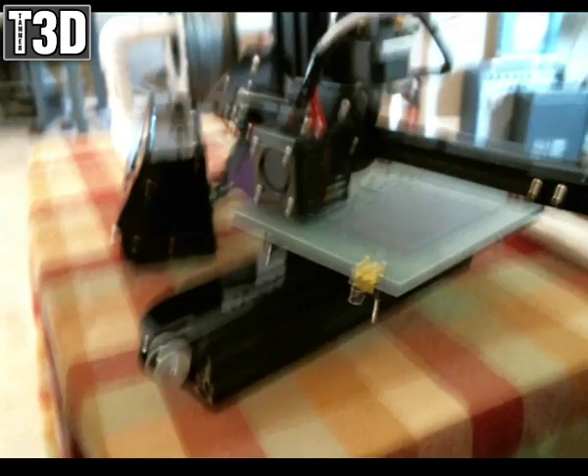Trying to hold my hand steady on 4 hours sleep, it's not as steady as it could be. This is also the first time I've tried printing more than one piece at a time, so I'm testing several parts of the design. You can see the regular flat panel with no axles is printing now, along with the frame connector pieces and the pins to connect it all together. That's what I'm printing at the moment.

And then what I'm going to do is iterate on this design - let me get you guys back up on top of the monitor and get the printer in frame there.

So what I'm iterating on in the design is I'm going to separate this piece so that it can just be glued onto one of the regular flat pieces. Should make it easier to print, because then I should be able to print it in this orientation here, which will eliminate the need for supports.

Good morning, James, or evening, wherever you're at - I think, isn't it?

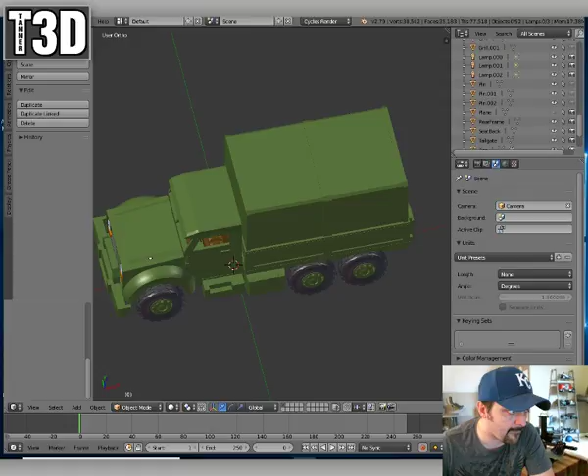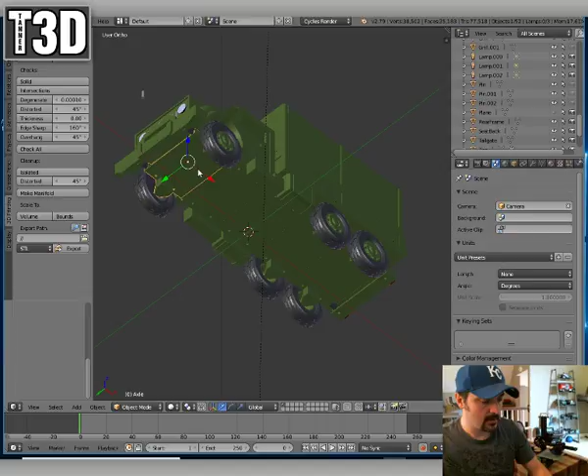We're going to take the truck, and the piece we're concerning ourselves with today is that piece right there. What I'm going to do is copy it and put it on its own layer here in Blender.

James Bird, what's going on, man?

I still haven't solved the issue why every time I slice something, it's off center to the right. My build volume is correct on Cura - it's 150 by 150 by 150, and it stops where it's supposed to on this edge. But on this edge, it starts printing like 25 millimeters in. I can't go edge to edge on the build plate, which when you only have 150 millimeters cubed build volume, losing 25 millimeters sucks.

I'm going to have to try to figure that out, because there's a couple parts that when I get to them, unless I want to slice them into a whole bunch of pieces, it's not going to be printable there.

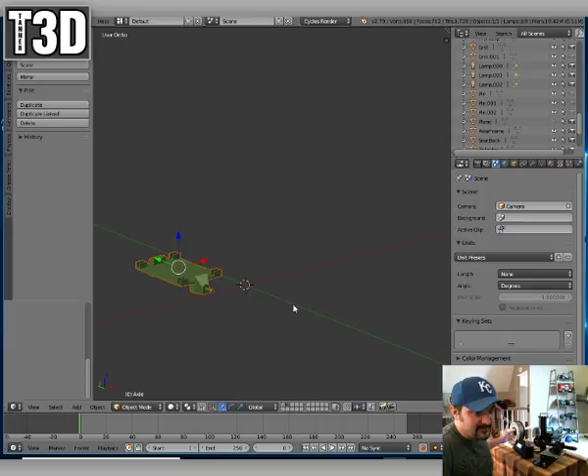So I got these little legs for this side, for the other side rather, that I still need to cut out of the longer piece. Right now I just stuck the longer piece in there and it's stable. This was $5 worth of PVC at the hardware store, and that way I don't have to sit here and manually take filament off of the spool anymore.

Chris, good morning, buddy. How you doing?

Awesome, yes man, that would help me immensely. I probably should have just emailed you when I had the problem. That would be incredible to get the full build volume back on the printer.

Scalda, how you doing man?

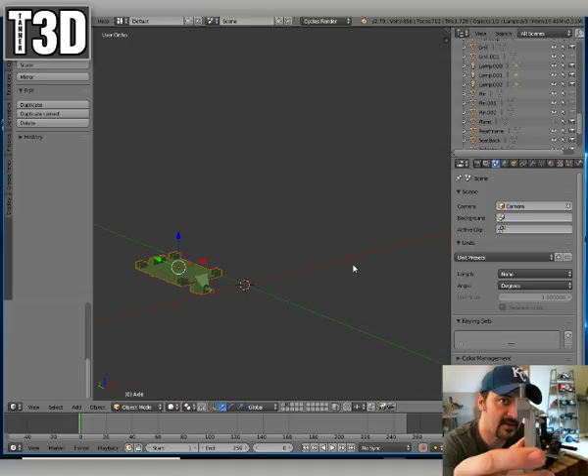So we're iterating the design on the axle. If you weren't here earlier, I printed it successfully, but this thing took a long time to print and had a whole bunch of support material. So my plan to fix it is to make these pieces separate pieces that'll have to be glued onto the flat plates that didn't have the axle design. I'm going to separate just this piece and make it one piece, so when you print it, you just print a couple of those - let me show them on this end. Print a couple of those, and they shouldn't need support printed in that orientation, and it should make it better.

The first thing I'm going to do, and excuse me if I'm yawning, I got in early. I had a closing shift last night, got in at 4 a.m., and my wife called me at 8 a.m. and woke me up to go deal with some stuff at the bank. So I was going to start streaming as soon as I got up, but I had to go run and do some stuff.

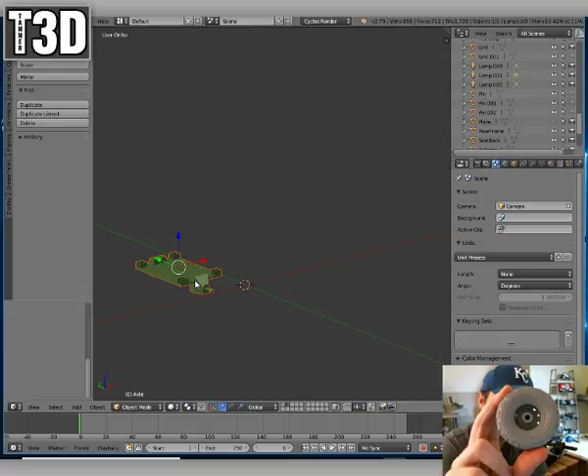I'm so happy to be printing stuff, you have no idea. In case you weren't here earlier, that is a tire and wheel that has been successfully printed. Looks pretty nice. My design requires a little bit of support because of the rounded sidewall of the tire, and the supports don't come off that clean. I guess I could sand them, but the way I've got the wheel oriented, it's facing the inside of the model anyway, so it's not really that big a deal.

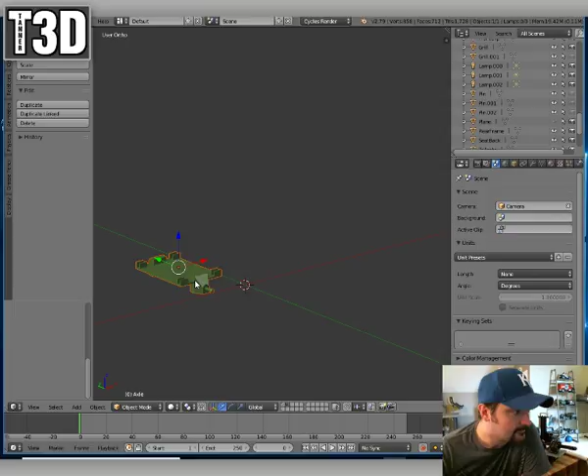I don't know how long I'll be streaming for sure. I know I got to leave to pick up my son from school at 1:30. It is 11:09 here, so I'll definitely be done by then. But otherwise I'll sit here and chat with you guys as long as I can, and as long as you're willing to listen.

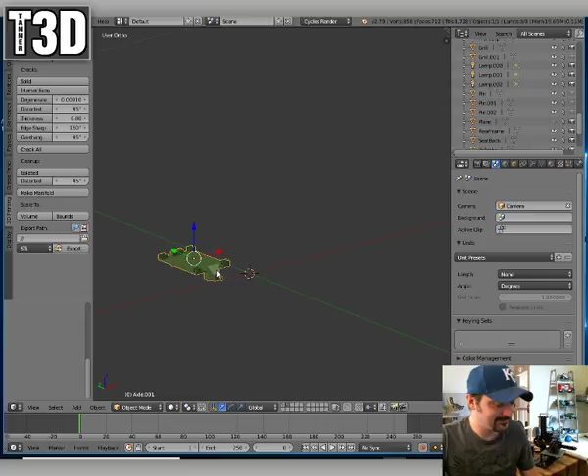The design iteration shouldn't take me too long, I don't think, because all I'm really doing is here - clicking on the vertex mode, edit mode. I'm going to hit Z to go into wireframe view. I'm trying to be better about explaining what I'm doing step by step, so that if you guys want to learn to do this stuff and try it yourselves, you can.

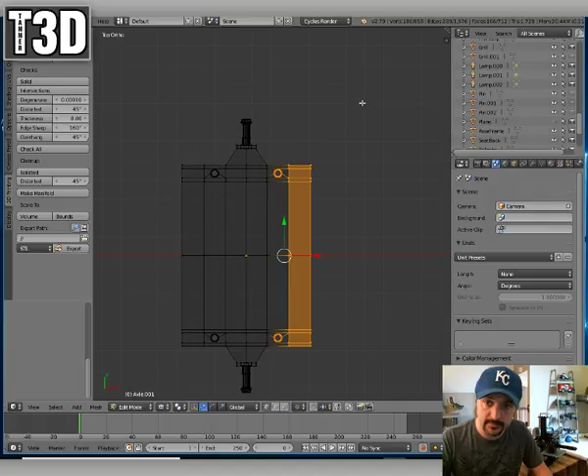I hit the B key on the keyboard, that's a box select. I'm going to select all the vertices that aren't part of just the one axle piece, which I think those vertices are. Alright, and I'm going to hit delete vertices. Hit Z again to come out of wireframe mode, and now we can see there's the axle isolated all by itself.

Now, in order to make it a manifold piece again, I'm going to have to close off that hole. Best way I can think to do that is I went into the edge mode here, and I'm going to select those edges. You hit the F key and it makes a face - see, so it made a face between the two edges I selected. Select those two edges, hit F to make a face. Those two edges, F. Those two edges, F. F. And F.

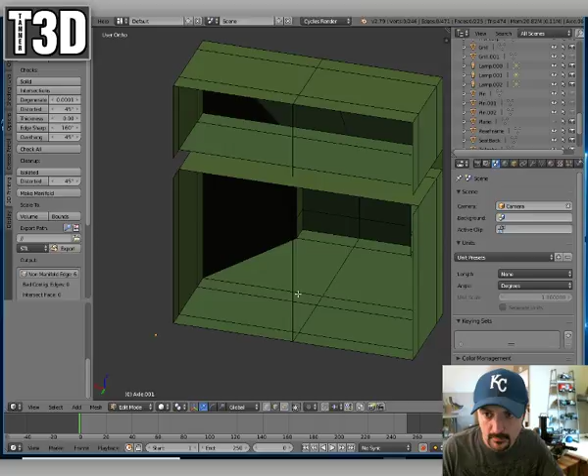Let's undo that. Let's go to face. Let's delete this face and delete this face.

So down here, these three little buttons. This one is vertex select mode, which allows you to select individual vertices, or if you hold down shift and select more than one vertex. If you want to grab multiple vertices, you'd hit B to do a box select, or C to do a circle select, and as long as you hold down the button, it grabs whatever vertices you drag the mouse over.

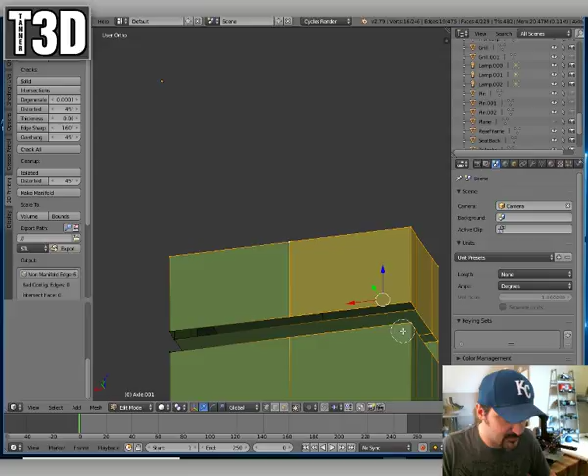And then this is edge select mode, which you'd be able to select all the same ways, using B to do a box select, or C to do a circle select.

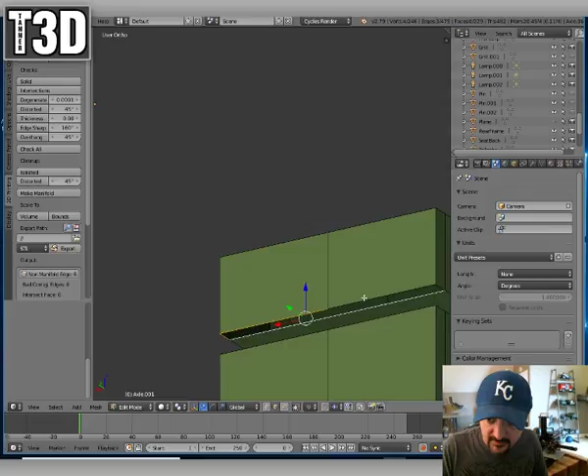So how I'm going to try to fix this, and sometimes it usually works out well, is to select individually every edge along that. Now when I hit face, it should include each individual edge there in that face. Because the way I did it before, when I only selected this one and this one, it made a 4-sided face. Technically it's a 5-sided face because of the dividing line there, so I'm creating an N-gon.

N-gon is any shape with more than 4 sides, but it doesn't seem to affect things too bad as long as your part is manifold. Sometimes you have some issues and you have to go back and redo it.

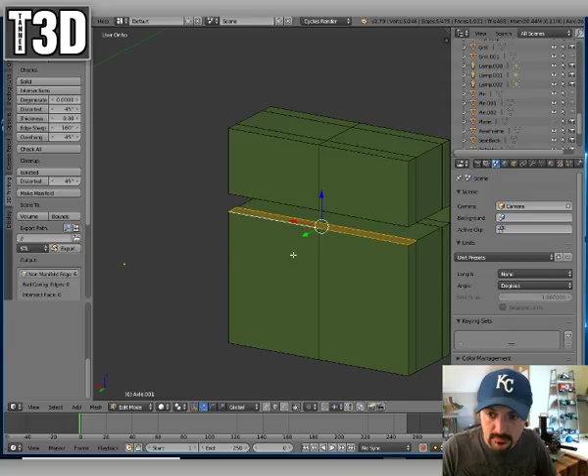So I selected all 5 individual edges, hit F to make face, and now we'll go back over and check all again. As you can see, we eliminated our non-manifold edges.

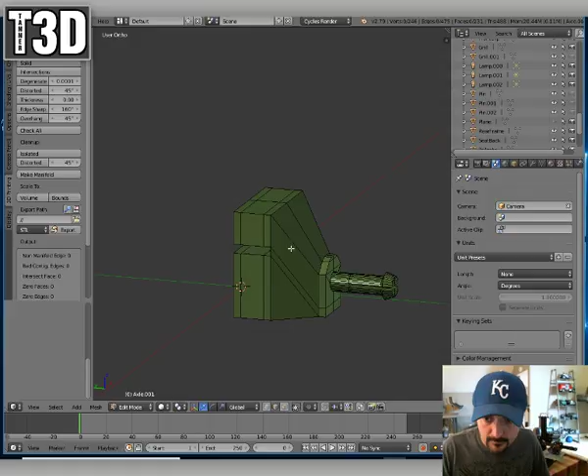All right, so here is the piece now that I think I should be able to just print out and orient it so that the axle is pointed up. I should be able to print that, I think, because that would be some very, very minor bridging. I think I'd be able to print that with no support at all, and it would be okay.

Yeah, James Bird. The computer I'm using now is an HP workstation, the XW8600, and I bought it as a refurb unit back in 2008. It's got a quad-core Xeon in it and everything, but it only came with a 32-bit version of Windows.

It's a machine capable of running 64-bit Windows, but in order to upgrade, you can't just run an upgrade like you would on a different version, like from Windows 7 to Windows 10. You can't just run an upgrade, because you're changing at the very kernel level from 32-bit to 64-bit. The only way to do it without error is to completely wipe the drive and start over.

There are so many things on this computer that I don't want to lose, and I would never be able to back it all up because it's 10 years old. My best bet is just to move forward with another machine, and that's the plan. It's in the future.

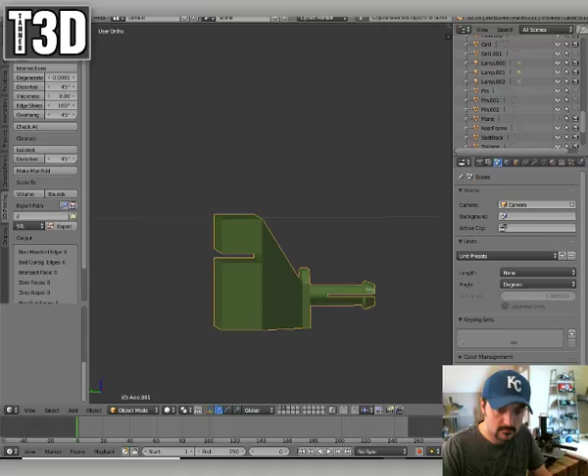So I'm going to go back over here, finish this up, save it, copy that... paste it in here, and export it as an STL. That was under MVS Truck, and we're going to call it Axle V2, with an underscore. All right, export STL. Oh wait.

Ha, almost forgot. For some reason, when you're exporting, it doesn't keep scale right - you have to multiply everything before you export it in Blender by 1,000 in order for it to maintain its scale. It's weird, you know, I'll use the MeasureIt tool, and it says it's spot on, but if you just export it the way it is, it's teeny tiny. So, scale times 1,000, Axle V2, export STL.

So now we'll go over here, Axle V2, open it up in Cura. You'll see that lovely Cura 2.3.1 popping up here in a minute. There it is, 2.3.1. Everybody kept telling me to check my build volume in Cura that I had designated, but the profile that I set up - I did it all on my own, so I'm sure I messed all sorts of things up. There's probably a lot of settings that could be done better because I was just winging it. But I have it set to 150 by 150 by 150.

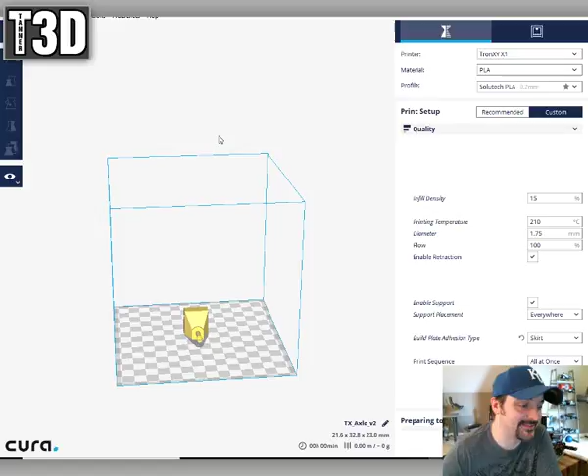Yeah James, man, if you got it, I'm open to all ideas. Chris is going to send me some screenshots of where I need to change some stuff, like setting my home point or whatever it was that he said. See, I'm so new at this, I don't know what, but I know he's going to help me. That's where I'm at, and I'm excited, he's already helped me so much. Not only would I not have this machine right now, it would not be running without Chris Riley, because if you watch the live stream where I set it up and attempted to print for the first time, it was essentially Chris popping in and me going, okay, what do I do next? Because I don't know.

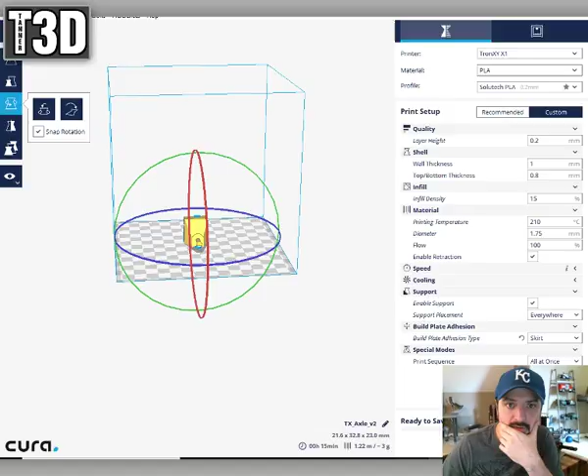No, origin to center is not clicked. I can show you - there's the settings, printer, manage printers, TronXY X1, machine settings. So machine center is 0 is unchecked, heated bed is unchecked, all this stuff. The only thing I messed with was this, trying to see if that was originally set to 20 millimeters. I set it to 0, hoping that was my problem and it would start printing over, but that didn't seem to make any difference. I don't know why the gantry height is all 9s - that was default and it seems to be working, so I left it alone. But yeah, my width, depth, and height are all set to 150.

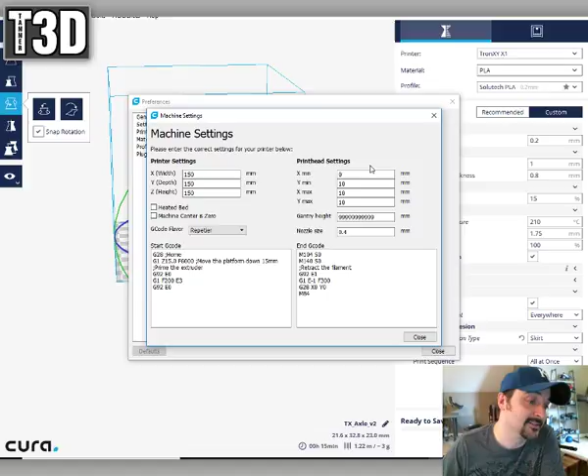And then the print head settings, by default for some reason that was 20 millimeters, and again I don't know what any of these settings actually do or mean, I was just trying stuff that was originally set to 20 millimeters. I set it back to 0 and was hoping that would get me my 20 millimeters or so of the bed that was missing, and it didn't seem to affect anything.

So anyway, we've got this. Let's stand it up on its end. Come on now, not wanting to rotate. There we go, stand it up on its end. See if it slices. Slicing.

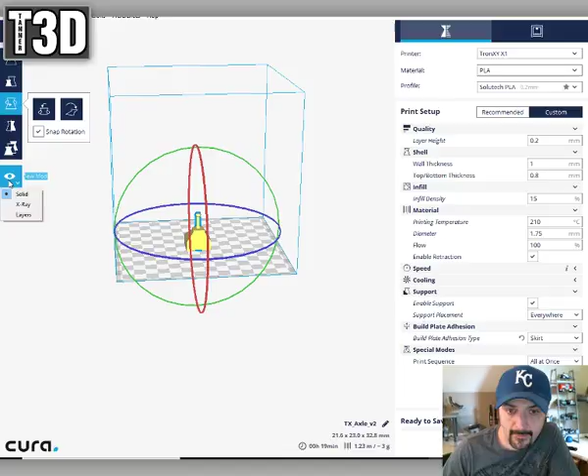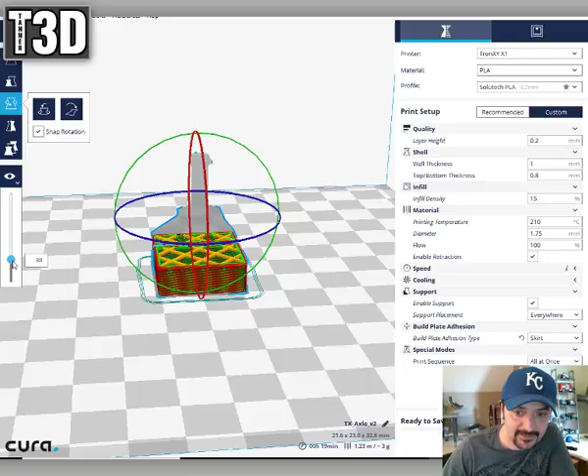View mode, layers. Scroll in a little bit. Let's go down here - this is what I did not do with the other, was check this part. So it's going to have to bridge down here. Rotate that around, or have that supported, either way. Right now it's got supports turned on, but I don't think that's too extreme of a bridge. It doesn't look like it's enough support material to worry about anyway - looks like I can snap that out pretty easy.

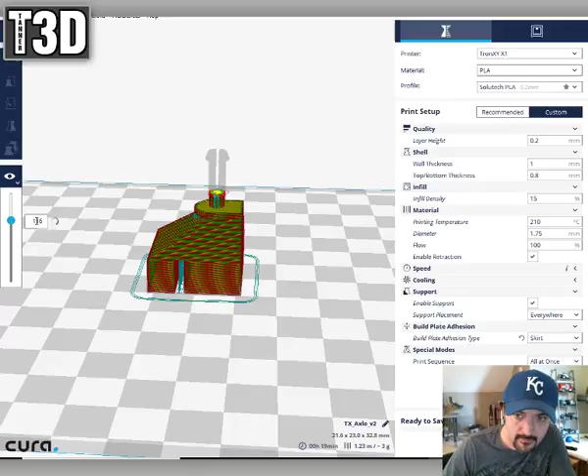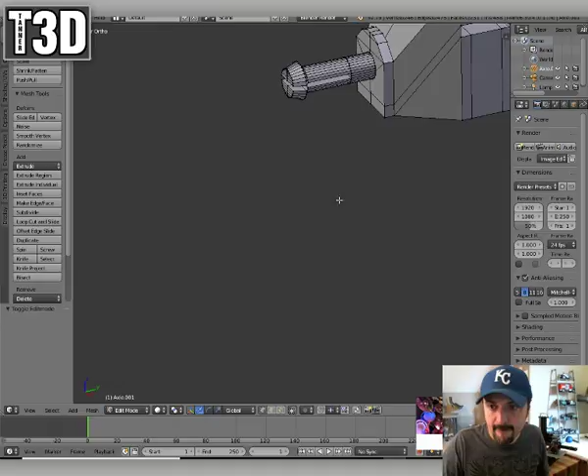You know, another thing that might make this more rigid, might make it better - I'm going to go back into Blender and change something else about this. I'm going to make less of this space here. I think that might be too much, and it's compromising the rigidity. I think that will be enough to give me the deflection I need to press that piece in, and I may actually take that and scale it in a little bit, make that a little less pronounced.

I'm thinking it might be a better idea to thicken up the whole axle too, this whole shaft, to make it wider. But then that's also going to mean I'm going to have to modify the wheel again. I think if I do that, I can keep this wheel and not scrap it by taking a drill and drilling out the inner diameter there a little bit, and still make it a usable wheel, and then just have to change the design on the wheel in the future.

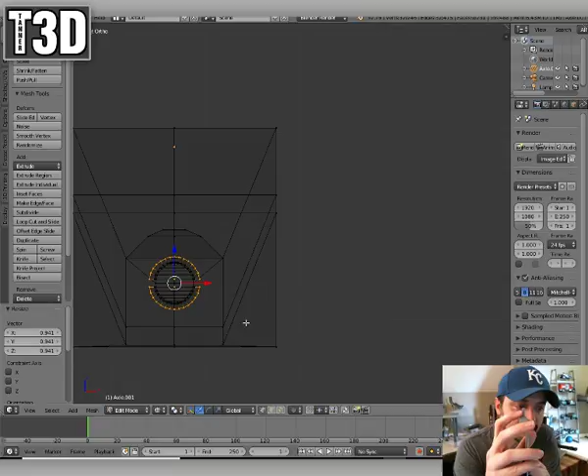I don't know, what do you guys think? Do you think that the axle here looks too thin? Am I going to run into problems snapping that off all the time just because it's so thin?

Thank you, James. I appreciate that, man.

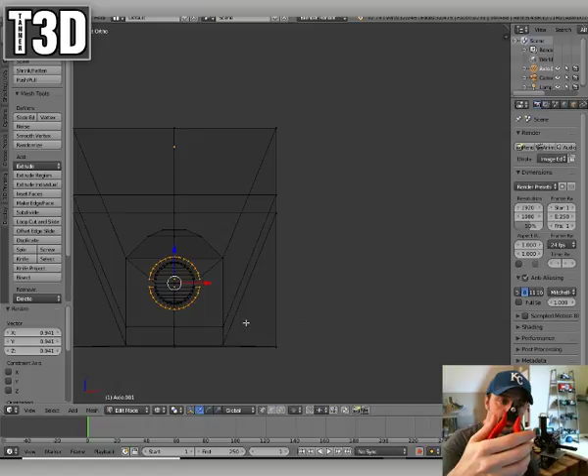Which I stopped by the hardware store yesterday - that's when I bought the PVC piping that I made my redneck spool holder out of. And I bought myself a nice little set of flush cutters, and I went to get myself a nice little set of needle nose pliers for helping me remove support materials, and these two came in a set together. So, and they're really nice, they're Crescent brand.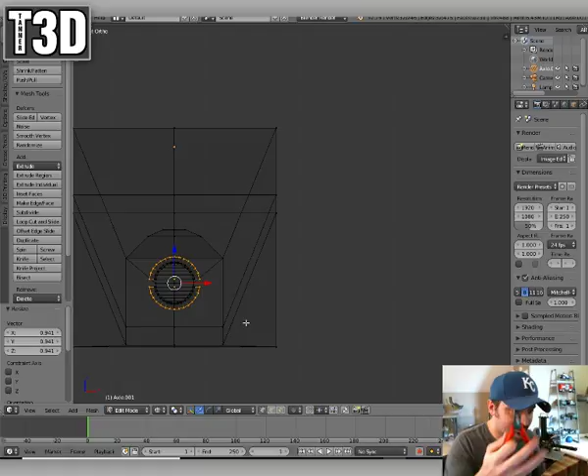These work like a champ. Removing the supports on this, I snapped those supports out in literally seconds, versus trying to dig the supports out of this with a box cutter, and I even hit it a little bit with a screwdriver just trying to get some of the initial thicker parts broke, and I had a dickens of a time removing those supports. So I'm hoping now having a good little set of needle nose pliers and some flush cutters is going to make my life easier.

Let's see, it says we got 3 watching.

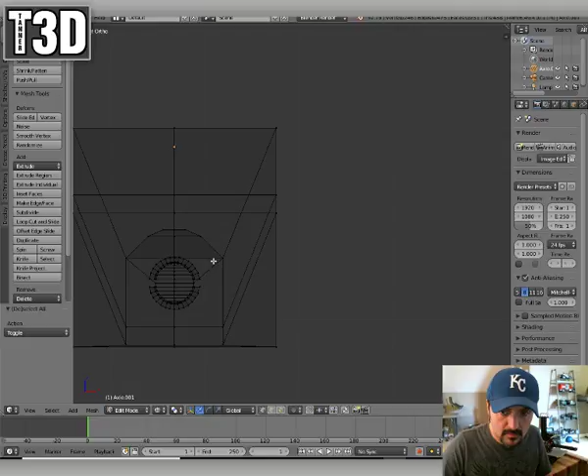All right, so yeah, I might try thickening this whole thing up, bringing the wheel over here too.

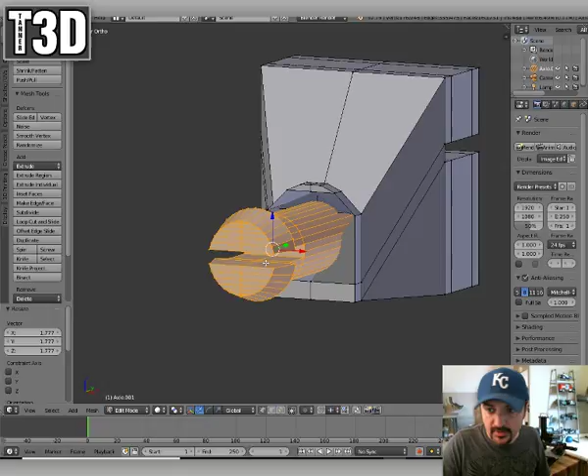What's it look like if I thicken the whole thing up about that? Oh, that is because scaling it also scaled those out. Grab those, move them back out flush here.

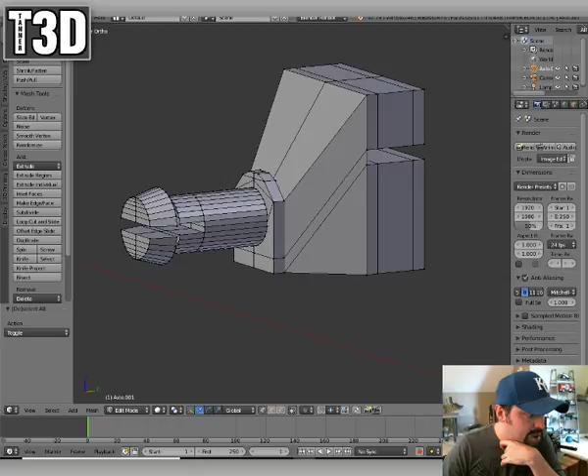All right, so let's go back to this. Let's save this. Let's go ahead and save this as MVS axle, and we'll put that under the components tab.

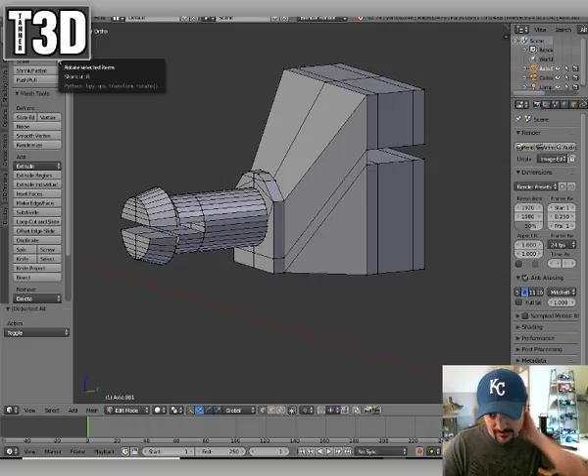And then we will open... whoops, not the bus. Although that's the piece I need, so I'll just copy it out of there. Yes, axle. Paste.

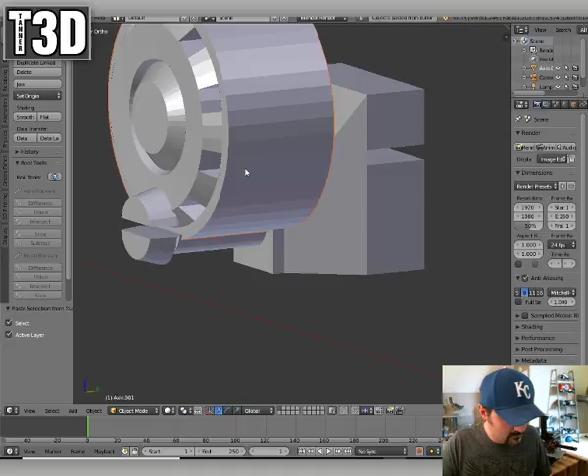Z, move it down to here. Get it roughly centered up there. Y.

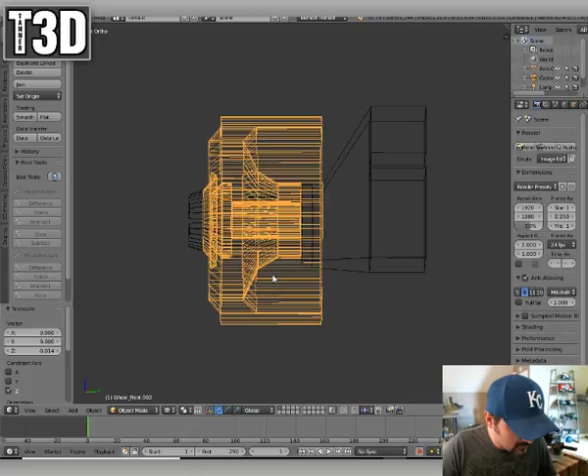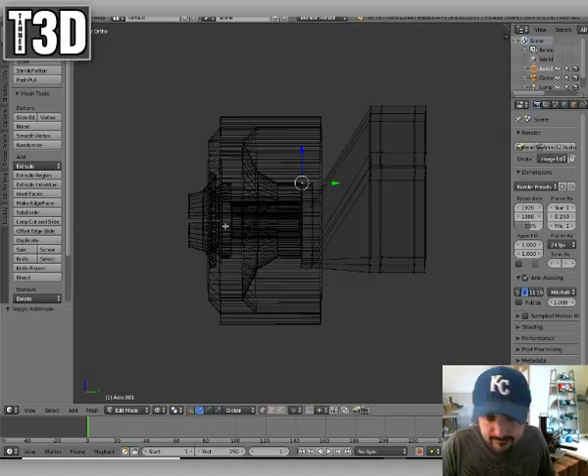Okay, when I scaled that out, it did mess with the tab. That one back to here.

I will check that out. Cool.

Yeah, like I said, I had no idea what I was doing, and I just left the stuff that I didn't understand default. And I can understand where the default isn't necessarily the best on some programs.

Scale that in, and scale just these 2 points back out.

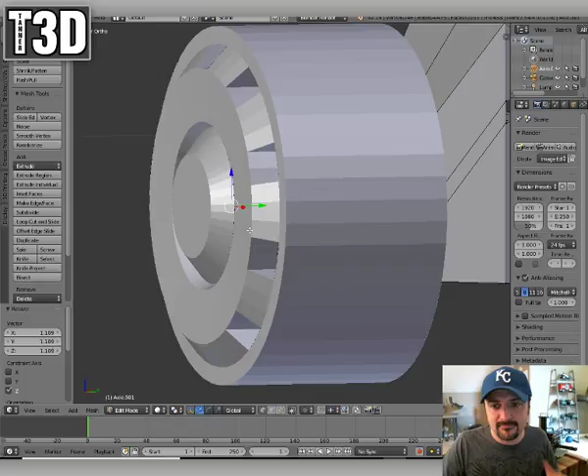See, so this shape you see here is the inside of the wheel. And I thought about making my wheel so that when you pushed it through, there was just a hole here and you could see that end. But I wanted to hide it if I could, and so I capped that in. But that may end up not being as feasible as I wanted it to be.

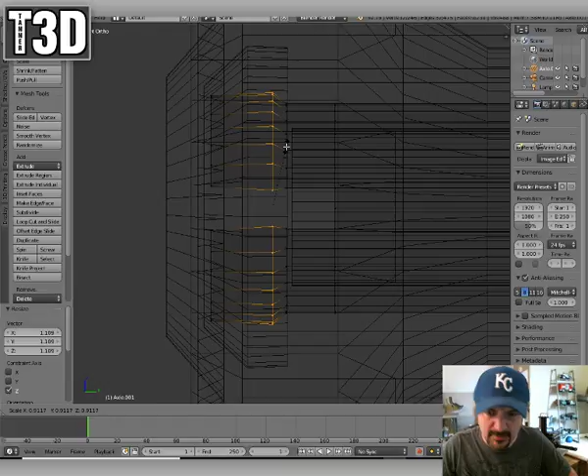Which actually, I think, scale that in more. I think that'll be enough because it's not going to have a lot of load on it this way. It's not like building an RC car or anything like that where there's going to be a lot of load on it. It just has to snap in there well enough not to pull out.

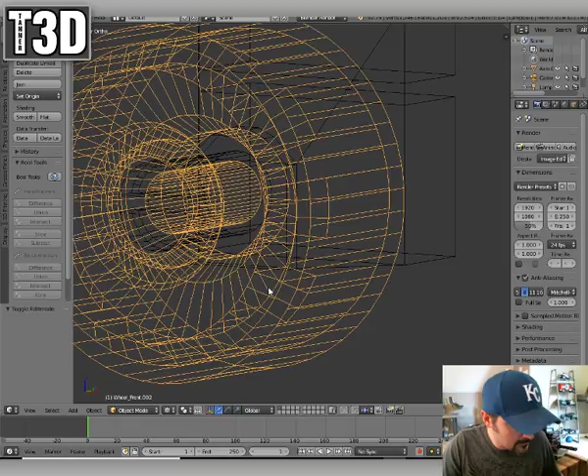But now where we're going to have to modify the wheel, so now I believe we're going to have... so I'm going to go into Edge Select, and if you hold the Alt key while on Edge Select, that will select a ring, so any piece that's continuously connected together, it will select the whole thing. And so right there, I selected that ring.

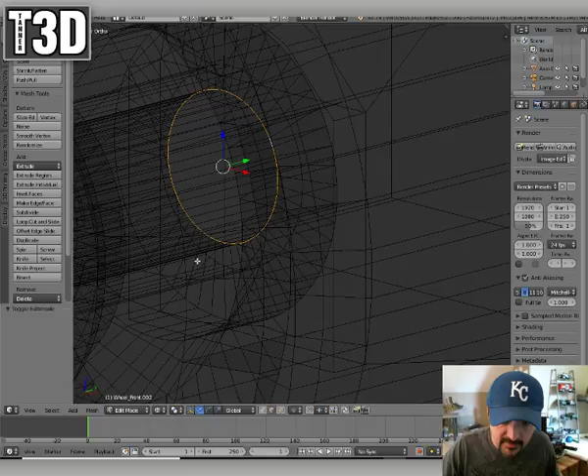And then just like any other selection thing on most programs, if you hold down Shift, you'll select more. So Shift and Alt, I'll select another ring. I'm trying to get all these inner rings here. So Shift, Alt, click, and click. Okay, so that's all of the inner rings.

So I need to scale them outward, to be slightly larger than the smaller diameter of our axle, which would be easier if my wheel was actually centered.

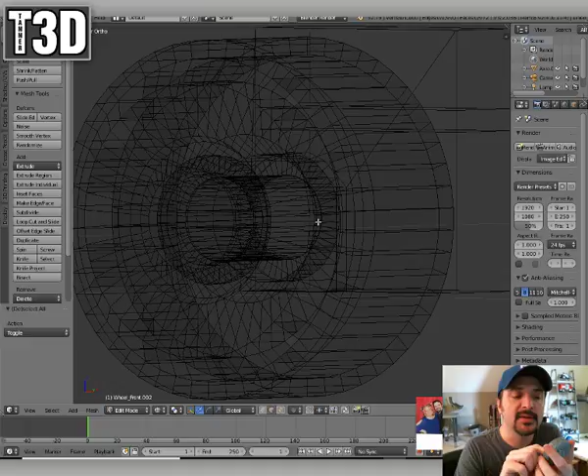All right, so that's modifying the wheel and the axle to make the axle thicker and the opening in the wheel wider. And like I said, since all I did was change the inner diameter, I think I'll be able to save this wheel by taking a drill and just boring out the center there.

But I think that's what we're going to try, is to save this. Take this, we'll copy, new, delete, paste, file, export, STL, MVS Truck, wheel... can't type today, 3.5 hours of sleep is not agreeing with me. Wheel version 3.

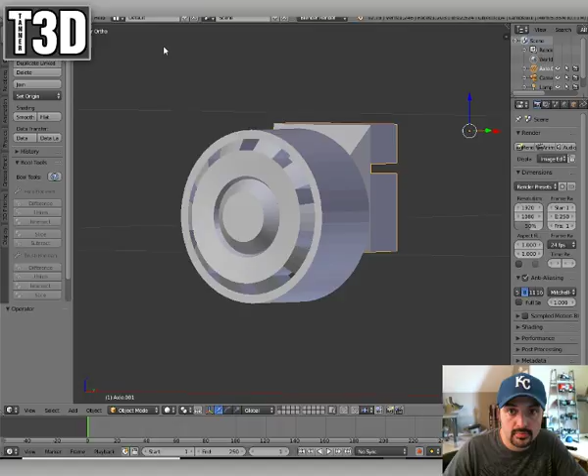Scale 1000, export, open recent, axle, copy, new, delete, paste, file, export STL, MVS Truck, axle, underscore version 3.

Export. So when this print gets done, the next thing I'll do is print an axle and a wheel and see if they work together. I can probably fit them both on one print, just take a little longer.

Checking the progress of this print over here, it's going well. We're at 45%.